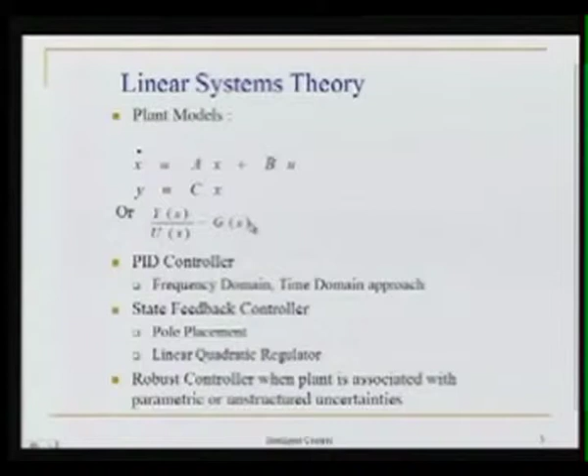So, this is an overview of linear systems: we have a state space model or transfer function model of an actual plant, and for these two models we design various types of controllers. For transfer functions, we design a PID controller or compensator using a frequency domain or time domain approach, and for state feedback we design pole placement or a linear quadratic regulator. And when models are not exact and there are certain uncertainties, we talk about robust control. That means, if the mathematical model given to me is a little uncertain, how robust is my control system in the presence of uncertainties.

So, now the question is that linear systems are very well understood most of the time in literature. From a design principle perspective, linear systems are well covered, but are systems linear? This is a very paramount question. Are our systems, the real physical systems, linear?

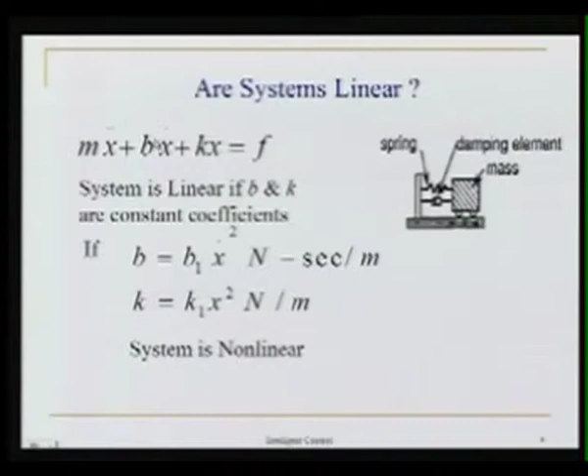But if these coefficients b and k have the following functional relationship, b equals b1 x dot square and k equals k1 x square, and we put these here, the system becomes nonlinear. So, what I am suggesting is that most of the time physical systems, although we model them using linear system theory, are nonlinear, and there are also systems which are inherently nonlinear. I will take a special class on nonlinear systems during this lecture series, but we will not talk much about the difference between linear and nonlinear. From the mathematical principle, we will discuss that as the course progresses. But what I am trying to say is that most of the systems we encounter are naturally nonlinear rather than linear.

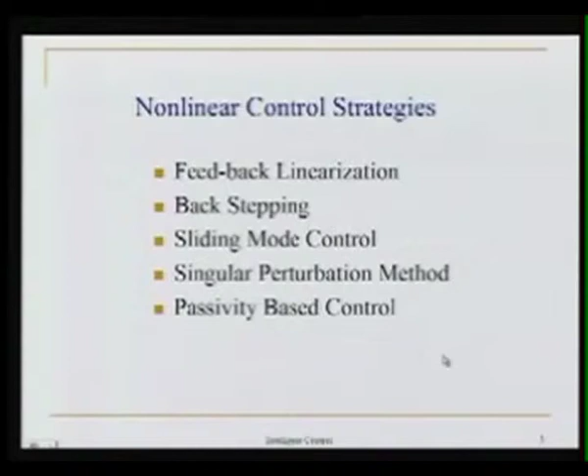And for nonlinear systems, researchers and control engineers have developed various theories to tackle these kinds of plants when the plant is nonlinear. There are certain popular control methodologies you have not come across in linear system theory. These are known as feedback linearization, backstepping, sliding mode control, singular perturbation method, and passivity based control. These are all various categories of nonlinear control methodologies.

Of course, we will not be discussing these nonlinear methodologies in detail, but we will adopt these principles while designing intelligent control. So, intelligent control, concept-wise, is not something quite apart from what we are studying in linear control theory or nonlinear control theory. Rather, these concepts are taken very nicely and put forth in a very convenient manner, in such a way that control design becomes very easy, and particularly you can adapt to any kind of plant.

Okay. So, here is a limitation of nonlinear control strategies: controller design is system specific. Normally, in linear system theory, for a generalized second order linear system you can always have a generalized control law. Similarly, for a generalized nth order system, you can have a generalized control law. But for controllers designed for nonlinear systems, every nonlinear system has a different structure, and that is why we can't make a generalized control law for a nonlinear system within the domain of nonlinear control theory. So, the controller design becomes system specific. We design a control system for a specific nonlinear plant with a specific nonlinear model. So, no generalized tool for analysis is present in nonlinear control theory.

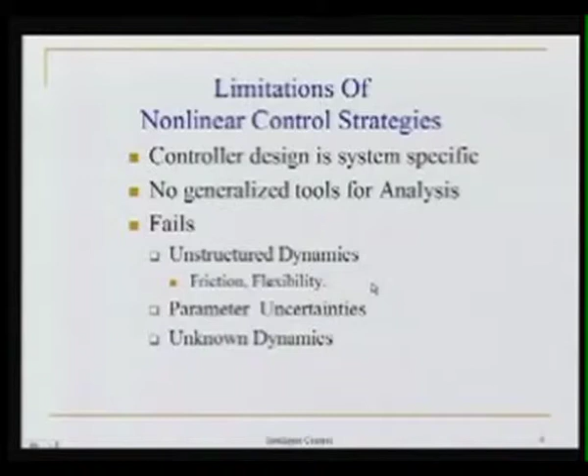Also, whenever there is unstructured dynamics, this theory may fail, that is, stability may not be guaranteed. Also, when there are parametric uncertainties and unknown dynamics, we do not know how they can be taken into account within the paradigm of nonlinear control theory. Although we have certain robust control and adaptive control methodologies for nonlinear systems to take some of these issues into account, in general classical nonlinear control strategies are not so robust against unstructured dynamics, parametric uncertainties and unknown dynamics. So, that is why we are now talking about intelligent control.

So, before we talk about intelligent control, is it that linear system theory is not intelligent? Is it that nonlinear control theory is not intelligent? One may argue, yes, you need intelligence to design a control system, whether it is linear control theory or nonlinear control theory.

But when we talk specifically about intelligent control theory, certain results in artificial intelligence, motivated by understanding intelligence, have been used in the framework of intelligent control, and that is why we say intelligent control. That is, when we use tools from the field of artificial intelligence, like neural networks, fuzzy logic, Petri nets, in designing control systems, historically the field has been known as intelligent control. Now, what is intelligence?

This is all control. How do we do control? So we observe and then predict, and finally intelligent interaction. Based on the model, I can predict various behavior, and according to whatever my desired behavior is, I do interaction. This is called adaptive control in classical terms. So the basic foundation for an intelligent machine, when I talk about intelligently observe, intelligent prediction, intelligent interaction, the classical counterparts are stochastic filtering, system identification, and adaptive control.

Now here, as I said, real intelligence is what determines a normal thought process of a human. Artificial intelligence is a property of machines which gives them the ability to mimic the human thought process. So intelligent machines are developed based on the intelligence of a subject, of a designer, of a person, of a human being. Now the question: can we construct a control system that hypothesizes its own control law?

Like, we encounter a plant, and looking at the plant behavior, sometimes we have to switch from one control system to another control system depending on where the plant is operating. The plant is operating in a linear zone or a nonlinear zone. Probably an operator can take a very nice intelligent decision about it, but can a machine do it? Can a machine actually hypothesize a control law looking at the model? Can we design a method that can estimate any signal embedded in noise without assuming any signal or noise behavior?

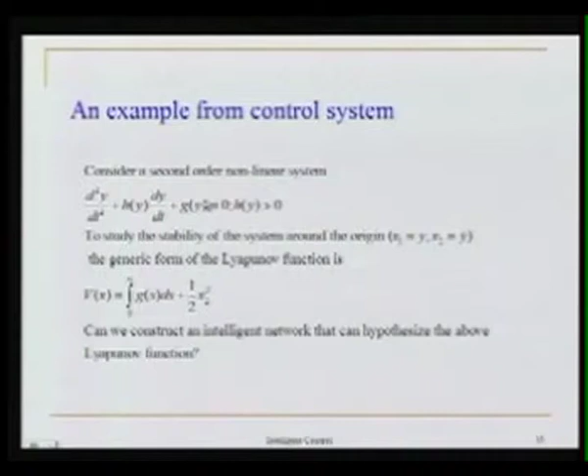But can we construct an intelligent network or intelligent machine that can hypothesize the above Lyapunov function? That is, given a nonlinear function, can the machine come up with its own hypothesis that this is going to be the right Lyapunov function for this system? If we can, probably we can say that we have an intelligent machine sitting right in front of us. We do not have to think; my machine can actually predict a proper Lyapunov function for any system.

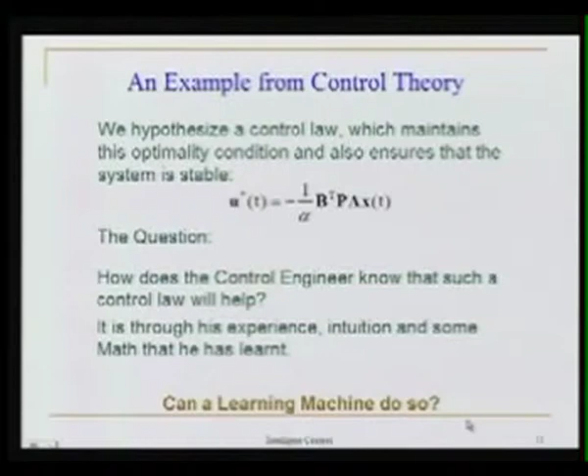But can a learning machine do so? This is the question. If I am trying to learn intelligent control, can I say that this machine that I have designed goes through the data from the system, and then says this is going to be a generic control law for this system? Can my machine predict? This is again the same thing that I said.

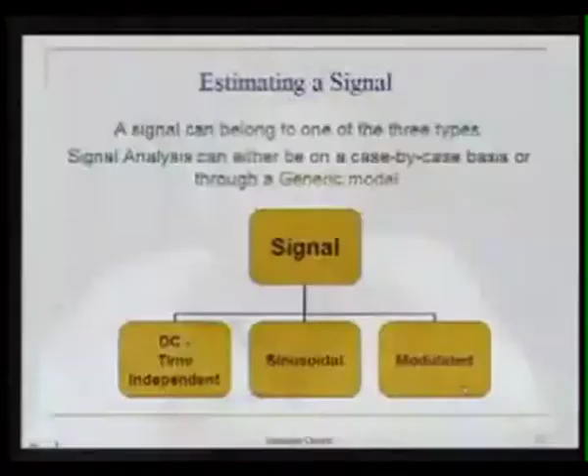When I have a signal, the signal can be DC time independent, sinusoid, modulated, various types of signals, and these signals are corrupted with noise, and I want to separate the signal from the corrupted signal. The noise injected into the signal may be Gaussian, non-Gaussian, and so on. In the classical approach, when I try to separate a signal from its corrupted counterpart, I always assume what kind of signal it can be and what kind of noise it can be. I take these models into account, and then I propose an estimator.

But can we say this kind of methodology is intelligent? The question is that we have to make so many assumptions before we make a predictive model. So, until now I just raised certain issues in your mind about intelligent control. What is intelligence? Why do we need intelligent control? So, here we can summarize the topic: why intelligent control.

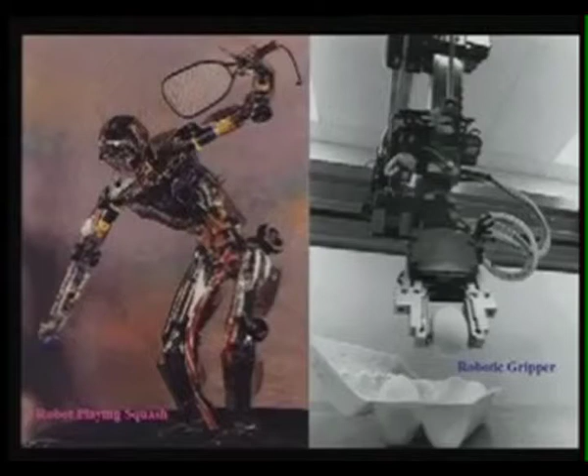So, let us ask where we would really like to use this kind of methodology. One typical situation is the unmanned vehicle, not only the flying one; we can even design a laboratory size automobile where the driver is a machine instead of a human being. Also here you can see a robot playing squash, or a robot can also play soccer. Here you see a robotic gripper picking a delicate object like an egg. This is another kind of robot gripper.

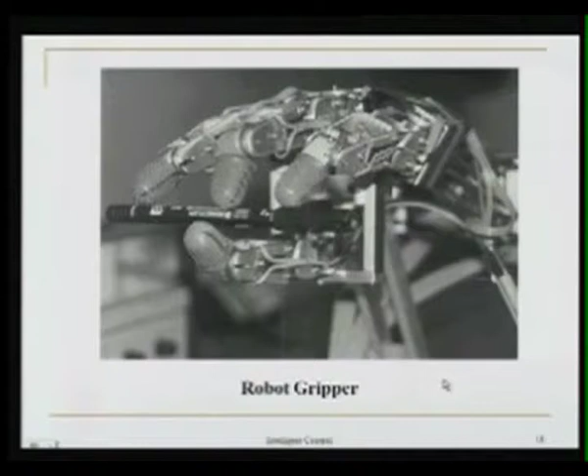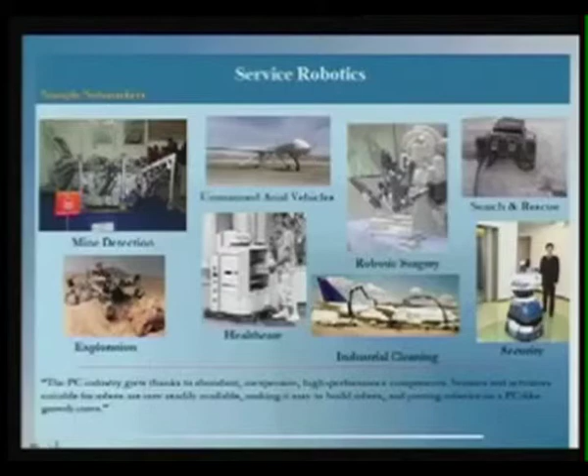So, there can be many varieties of sophisticated machines in applications like healthcare, mine exploration and detection, security, surveillance monitoring, industrial cleaning and so forth. Even here you can see robotic surgery. These are all activities that require expertise, and a human expert does these things very well. So, can we replace these human experts by intelligent machines? This is one of the questions that we always ask when we talk about intelligent control.

So, by saying what we are going to do with intelligent control, it is not that intelligent control completely rejects the methodologies that we have learnt in control theory, linear control theory, nonlinear control theory. It does not reject them; it also uses even conventional control methods. And these conventional control schemes can be very nicely or adaptively coupled in specific situations, which we normally call switching control, using intelligent control techniques.

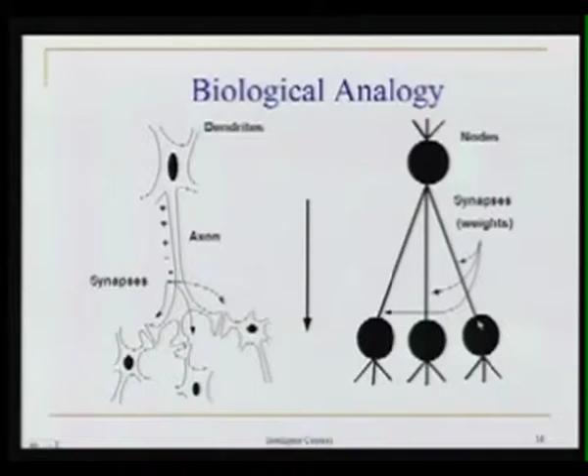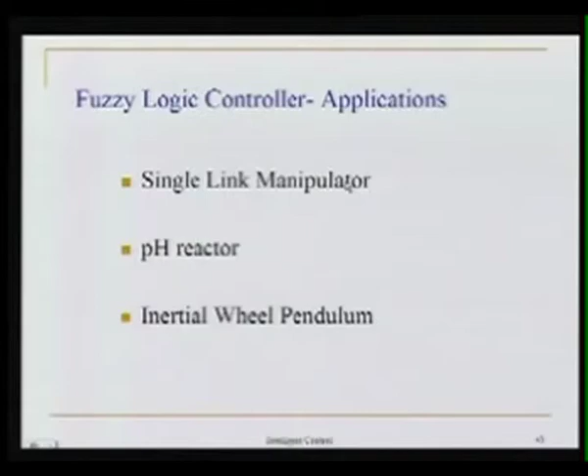So, this is a little detail a single link manipulator has. You see that because of the sin theta term, the system becomes nonlinear; it does not follow the superposition principle. We will be designing all varieties of controller: PID controller, fuzzy logic controller, and we will also use genetic algorithm to optimize the fuzzy logic controller.

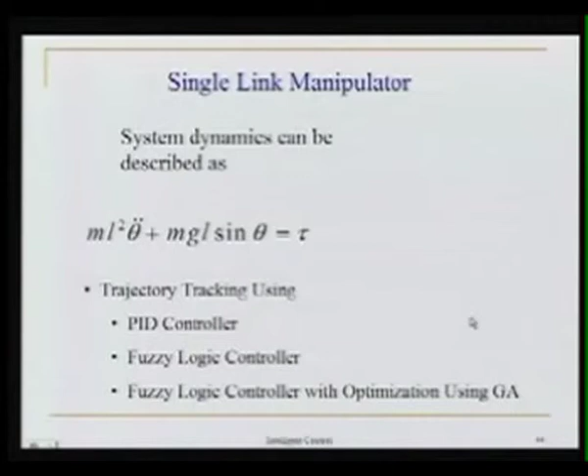So, these are the insights, the description of the course module that I am now making, so that you are very well aware of what we are going to cover in this course.

And here is a pH controller. You can see that this is a continuously stirred tank reactor, and here there are three things entering into this particular container: buffer substance, and then acid as well as base. These are various kinds of liquids that enter into this container based on their pH value. And the objective is that we want to maintain the pH of this container constant.

And so, what we normally do is that we control only the base flow. From the plant wastage or something like that, various things enter into this, and this waste product has to be discharged to the environment. But if its pH value is more likely acidic or more likely alkaline, accordingly this will have a very drastic impact on the environment.

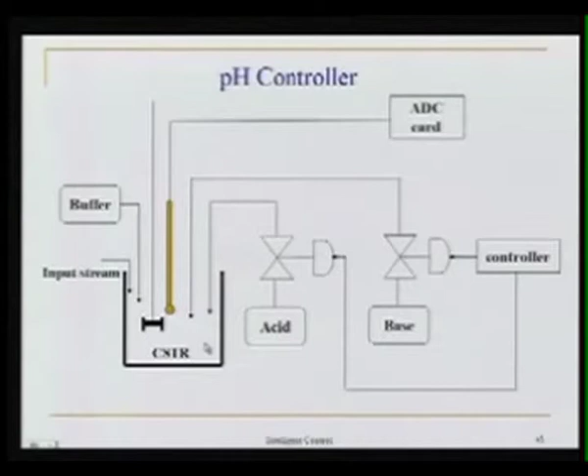To avoid that, we want to neutralize the pH value. Normally the neutral value of pH is 7, and so how do we inject either base or acid into the system such that this pH remains constant? Although this looks like a very simple system, the dynamics become nonlinear. We will show in detail how to solve the control system design for this system.

Actually, this is a practical system we have already done. We have synthesized a pH reactor, and we have actually applied a fuzzy logic controller to this pH reactor in detail. So, this we will take in detail.

The other controllers that we will be designing, we will demonstrate in terms of the application of neural networks. Here are certain systems that we will discuss in this course. One is robot arm visual motor coordination. This is hand eye coordination, just like when I pass a ball to my fellow player, there is enough coordination that takes place between hand, leg and eye.

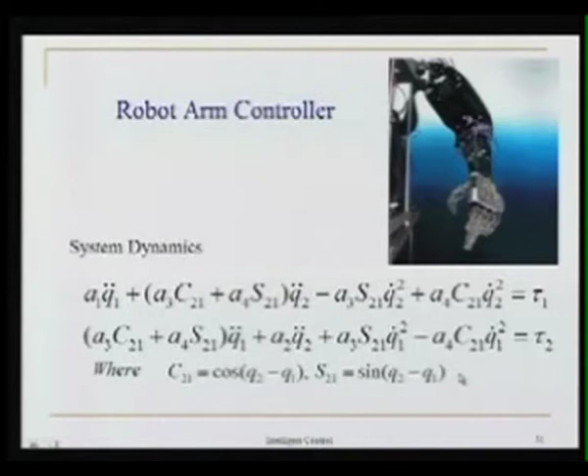So, this is called a binocular vision system. This is also called visual navigation. So, we will also discuss this kind of problem, and we would like to solve it using neural networks.

Okay. So, what I gave you today is what we are going to learn in this course. Of course, we did not tell in detail what we are going to learn, just highlighted some of the things that we are going to learn in this course, intelligent control. So, while saying that, let me conclude this lecture in a little philosophical manner, because we talked about intelligent control, but after learning this course or taking this course, probably we may still inquire about what, after all, is intelligence.

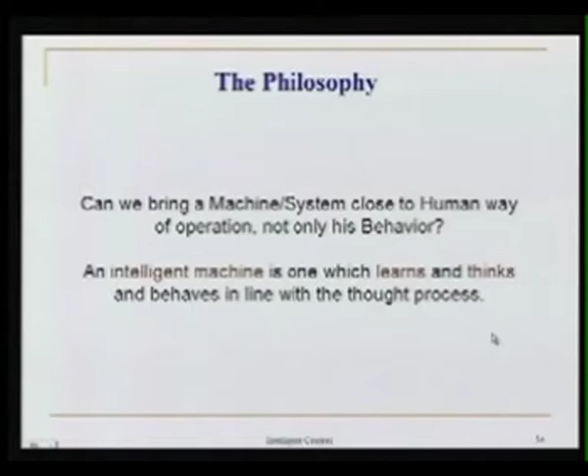And you will see that in the entire course, the various tools we will be discussing only deal with behavior; these tools are developed by mimicking human behavior, but not the human way of working. An intelligent machine is one which learns, thinks and behaves in line with the thought process that we would like, but at least at the moment, we are very far from this target of achieving real intelligence.

So, finally, I would like to tell you a very important aspect of intelligence, which is perception. Why I am saying this is that as you go through this course, you will see that we will not be addressing this issue, but these are the issues that make the concept of intelligence very exciting. So, I am talking here about the role of perception.

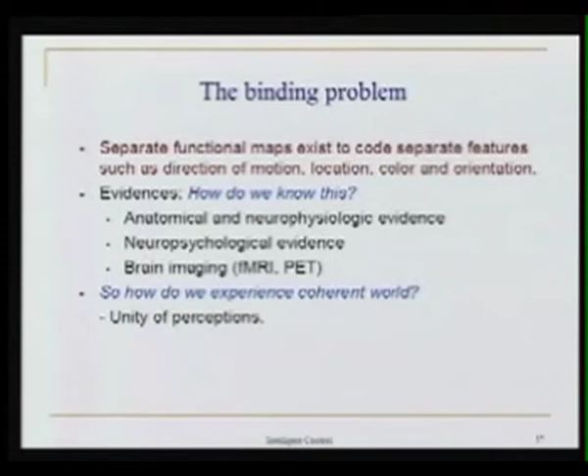So, we showed a brain. If you look at the various locations of this brain, we have the visual cortex, the auditory cortex, and various locations that perform various actions. This has already been verified using various studies in neuroscience: anatomical and neurophysiological evidence, neuropsychological evidence, brain imaging. These are various methods by which we know that various parts of the brain do different functions.

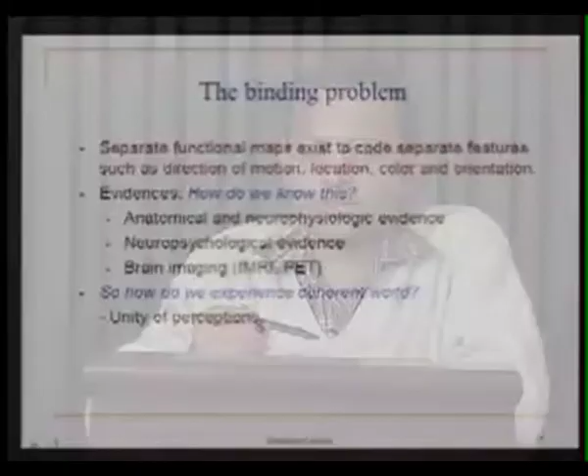But when we have a perception of the world, we have a unique perception, that is, how do we experience a coherent world? Whenever I perceive, I do not perceive that my visual cortex is processing vision or color, and my auditory cortex is processing sound and so forth. We perceive our environment in a very unique, coherent manner. This is called unity of perception, and intelligence also has something to do with this unity of perception and awareness.

Certain things are not very clear to us until now, but nonetheless you will see that this intelligent control course will be very interesting, because we can learn some new concepts, and we will learn how to apply these new concepts like neural network, fuzzy logic, fuzzy neural network, genetic algorithm, how to apply these principles in control theory.